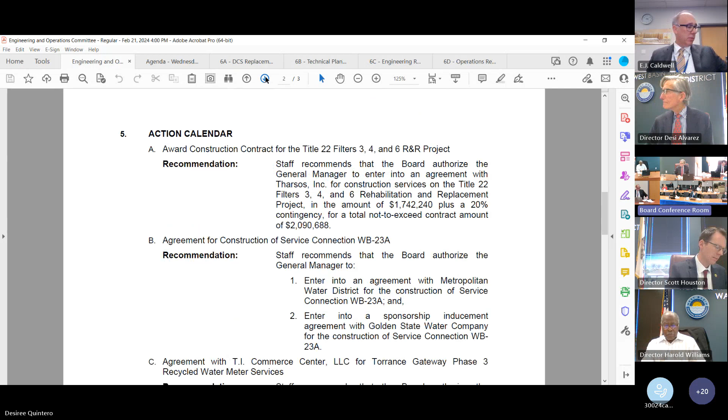First item up on the action calendar is the award of the construction contract for the Title 22 filters 3, 4, and 6 rehabilitation and replacement project. Mr. General Manager, would you introduce that item, please? Happy to do so, Mr. Chairman. This item is going to be presented by Orlando Rodriguez, our senior engineer, and it begins on packet page 4.

Thank you, EJ. Good afternoon, Chairman Alvarez and members of the committee. As EJ mentioned, I will be recommending award of a construction contract to Tharsos for the Title 22 filters 3, 4, and 6 R&R project.

As you may recall, in August 2023 at the E&O committee meeting, staff presented 3 alternatives, 1, 2, and 3, for the project to move forward. At that meeting, the committee recommended a hybrid alternative that combined elements of alternatives 2 and 3. Those were to perform an R&R on 3 filters now, also perform crack repairs on the exterior side of the north walls of filters 7 and 8, and then also moving forward to basically program ongoing R&R on the remaining filters, which were 11 total that we need to perform work on.

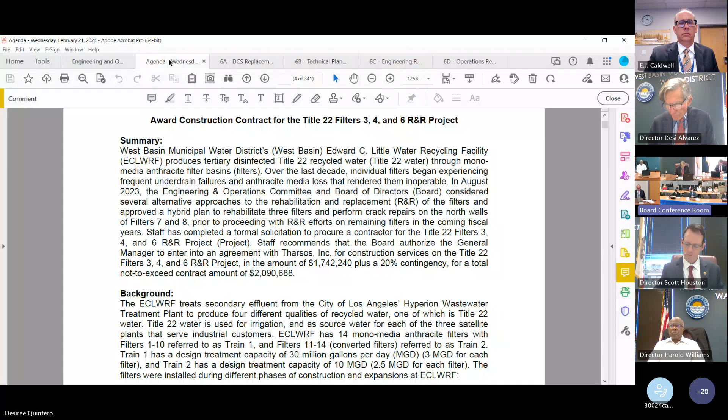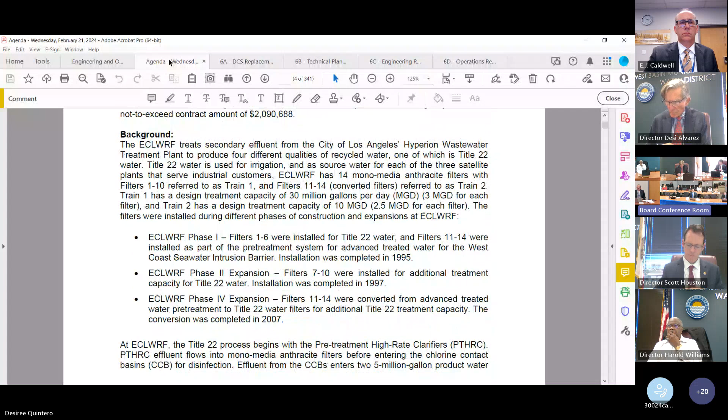At the August 28, 2023 board meeting, the board approved to proceed with the committee's recommendation. During that time, staff worked with the design consultant Carollo Engineers to essentially revise the drawings and specifications to reflect the recommended alternative. And in November of 2023, the construction bid package was completed, and therefore we proceeded with solicitation.

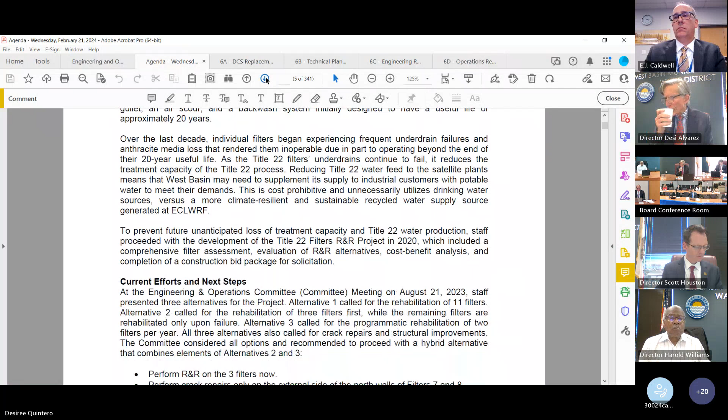The bid solicitation for construction services was issued via West Basin's online e-procurement system on December 6th of 2023. A pre-bid meeting was held on December 14th, 2023 via teleconference, followed by an on-site job walk that same day. 6 company representatives attended the mandatory pre-bid meeting, and 3 company representatives attended the on-site job walk at the ECL facility.

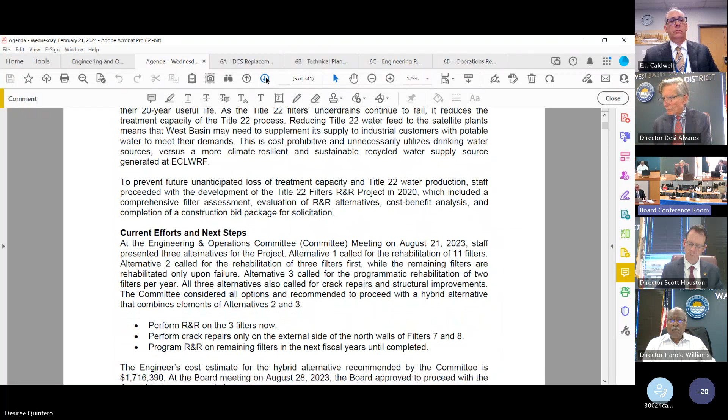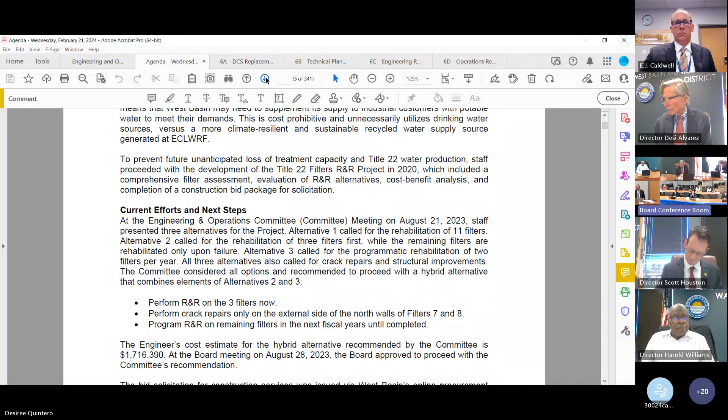3 bids were received and publicly opened on January 31st of this year, 2024, here at the DLD building. You can see the results of the bid opening on page 6 of the agenda packet in table A. The bid submitted by Tharsos Inc. in the amount of $1,742,240 was found to be the lowest responsible and responsive bidder. The engineer's cost estimate for this hybrid alternative is just north of $1.7 million, so pretty close to the lowest bid we received from Tharsos.

Tharsos is located in La Mesa, California, which is in San Diego County, near the city of San Diego. They have performed projects for several agencies in Southern California, including cities as well. Staff reached out to the contractor's references included in the bid package, and all of them seem to be in good standing, have worked, had good recommendations for Tharsos Inc., including actually West Basin. As early as 2013, they've done a couple projects for us, not only at our ECL facility, but also at our Chevron nitrification treatment plant facility. The most recent being in 2020, they worked on the sodium hypochlorite storage tank replacement project at ECL.

The preliminary construction schedule for the project, if we were to award this month, is to issue a notice to proceed next month in March, with construction anticipated to take place from March to November of this year, with project close shortly thereafter at the end of the year.

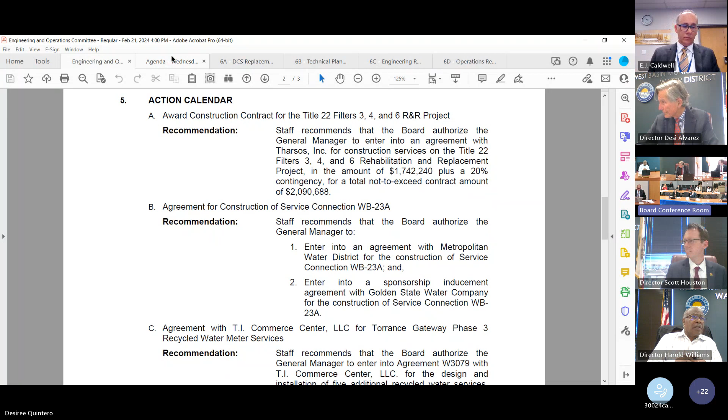All right, well, I don't have any questions, and unless there's objections, we would move this item forward. I concur. Well, this is a recommendation. And I second.

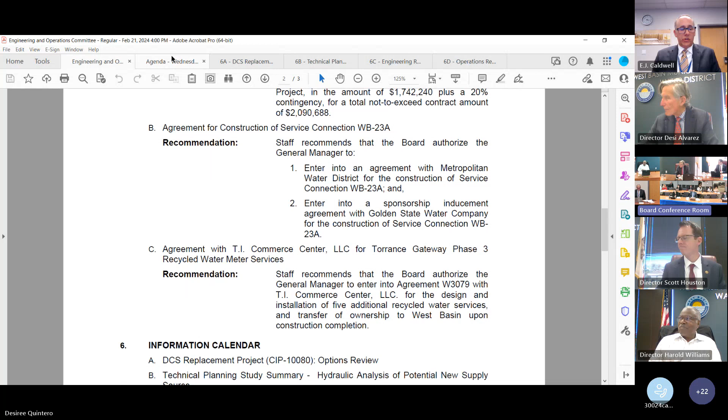Thank you very much, Mr. Chairman. So then we will move on to the next item, which is the agreement for construction services for service connection WB-23A.

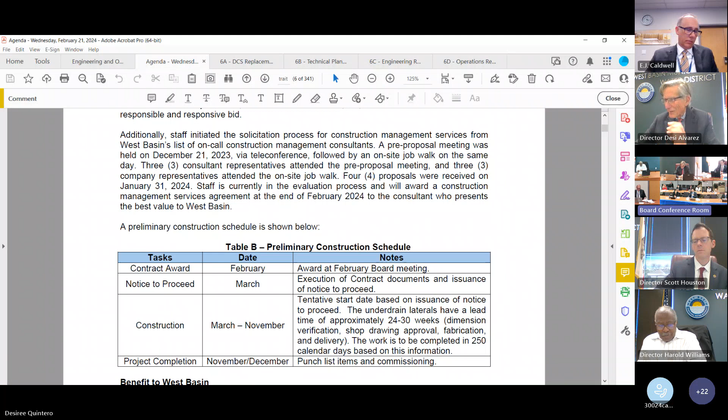Thank you, EJ. And as EJ mentioned, the copy of the staff report is on page 9. First, I'd like to start with some background on this particular project.

Back in March of 2018, Golden State Water Company requested that MWD service connection WB23 be relocated from the Metropolitan Culver City feeder to the Sepulveda feeder. Currently, all of Golden State's interconnections serving Culver City are located on the Culver City feeder. So as you can imagine, if there are any disruptions to that feeder, Golden State would have issues supplying water to Culver City. So they requested essentially a new service connection, labeled WB23A in this case, to add some redundancy to their system in case of any service disruptions.

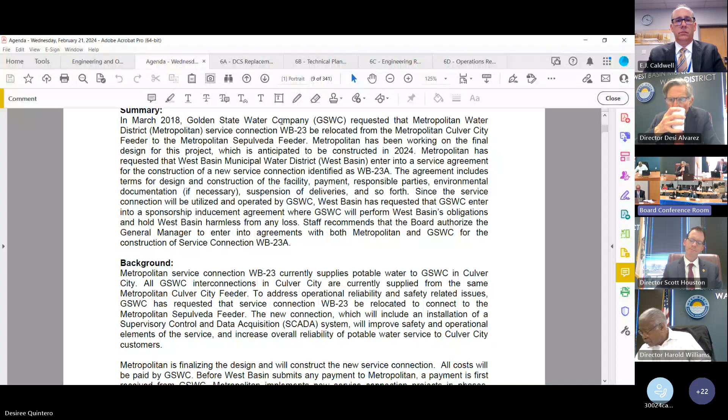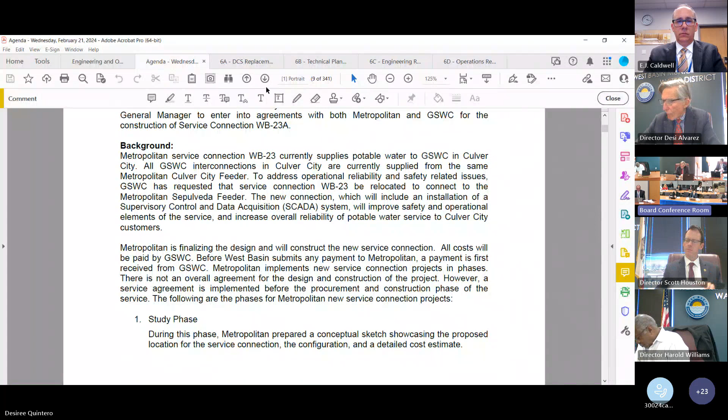Since 2018, MWD has completed the study phase for the project, preliminary design, procurement and fabrication phases, and more recently the final design drawings and specifications. Construction is anticipated to start this year.

As MWD gets ready to initiate the solicitation process to procure construction services next month in March, they have requested that West Basin enter into a service agreement for the construction of that new service connection. The agreement includes terms for construction of the facility, payment, responsible parties, environmental documentation if necessary, suspensions of deliveries, and so forth.

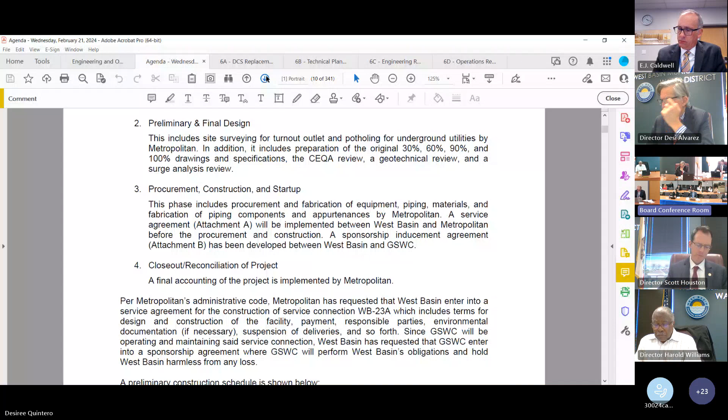You can find a copy of the agreement between MWD and West Basin on page 12 of the agenda packet as attachment A. After a few discussions with our legal counsel here at West Basin, it was recommended that...

...we then enter into what was called a sponsorship agreement with Golden State, seeing how they will be the ones utilizing and operating the service connection. So that agreement essentially states that Golden State will perform West Basin's obligations and hold West Basin harmless from any loss as described in the previously mentioned agreement with MWD.

You can find a copy of that agreement between Golden State and West Basin on page 16 of the agenda packet, and that is attachment B. In the end, all parties have reviewed the agreements, including staff, and have agreed to enter into the agreement for the construction of the service connection. Golden State is ready and wants this project to move forward.

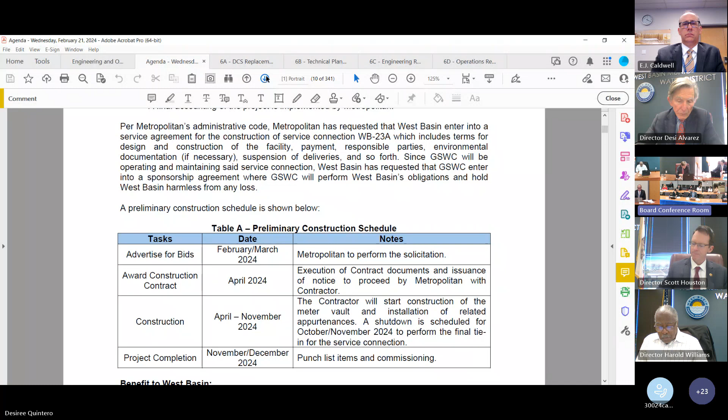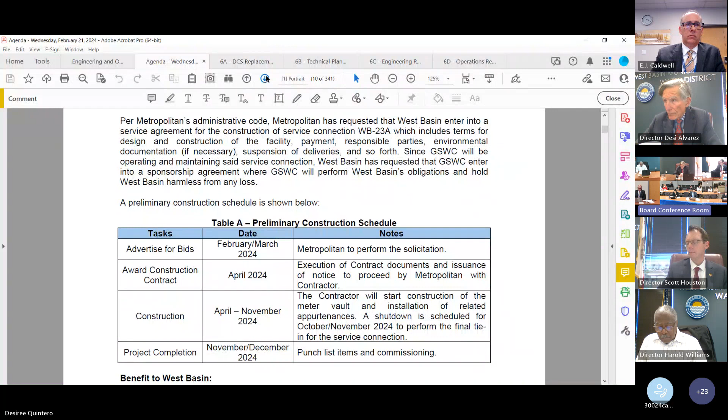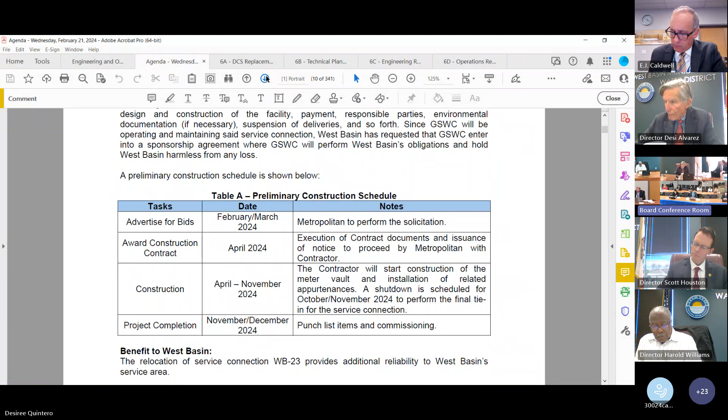So at this time, I would like to read the two recommendations. Staff recommends that the board authorize the general manager to enter into an agreement with Metropolitan Water District for the construction of Service Connection WB 23A, and enter into a sponsorship inducement agreement with Golden State Water Company for the construction of Service Connection WB 23A. And with that, I will be happy to answer any questions.

Mr. Chairman, if I could just add one thing, I really do want to commend staff. Our retail agencies are our highest priority, obviously, and the coordination between Golden State in this case and of course Metropolitan Water District, it takes quite a bit of work back and forth to make sure that everything is taken care of and that all parties are happy. So I just want to compliment staff on all that work.

Thank you. Okay, Director Williams, do you have any questions? Well, I did, but no, I don't. But it says here that this has been reviewed by both our executive engineer and a general manager. And from what I've heard here, I believe that I have no questions in terms of their work. Everyone's happy with it.

Director Houston, do you have any questions? No questions, just hope it's smooth sailing. And Director Gray, do you have any questions?

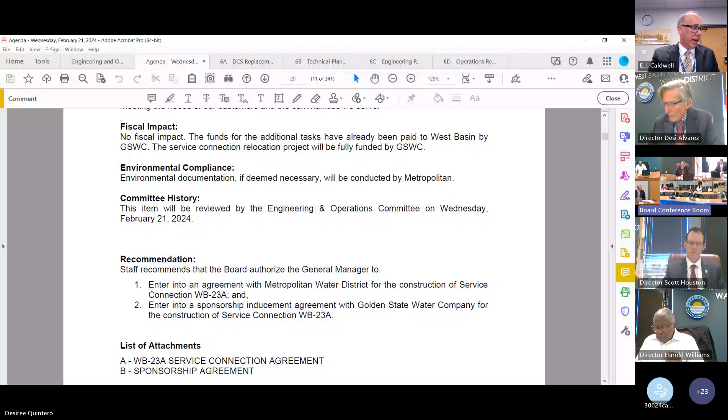All right, we will move on to item 5C, the TI Commerce Center for the Torrance Gateway Phase 3 recycled water meter service. This item begins on packet page 20, and for this presentation, Veronica Gobea, our engineering supervisor, will walk you through it.

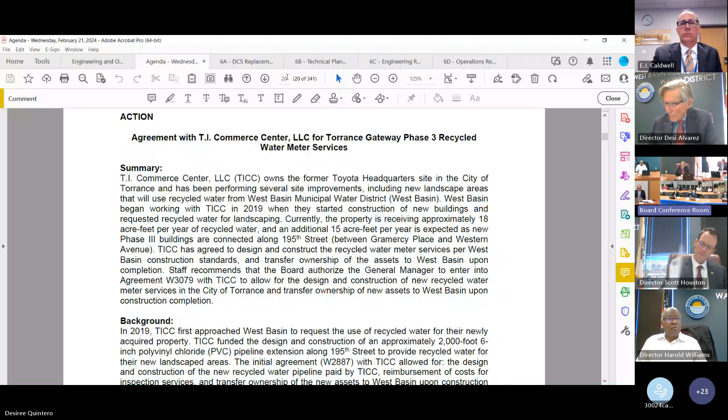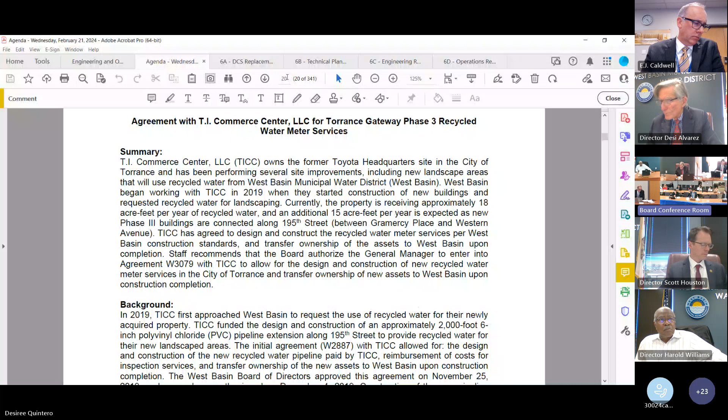Good afternoon, directors. This agreement is the third phase of this particular site. Back in 2019, the TI Commerce Center, who owns the former Toyota campus, approached us wanting recycled water within their campus. We went through an extensive review of plans and agreements for services to be provided to them. The first phase included the design and installation of a pipeline and some services, and West Basin was reimbursed for the expenses produced during that work.

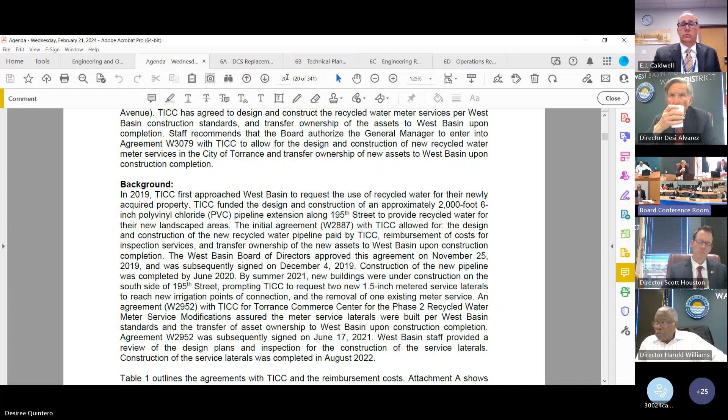A few years later, there was a second phase that added a couple of services to that pipeline. Services were minimal, basically in-house labor to inspect and review plans. That phase started in 2021 and ended in 2022.

In 2023, the TI Center approached West Basin to add an additional phase, bringing more recycled water to the campus by adding 15 acre-feet of recycled water to the site. West Basin worked with them to design lookup plans and draft an agreement consistent with previous reimbursement references. So we are here to present that agreement.

The agreement has been reviewed by West Basin and its legal department, as well as by TI Commerce Center, and we are here presenting it. Staff recommends that the board authorize the general manager to enter into agreement W3079 with TI Commerce Center LLC for the design and installation of 5 additional recycled water services and transfer ownership to West Basin upon construction of the project. I'll open it for any questions.

Thank you. Director Williams, do you have any questions? I don't have any questions, but I followed the history of that facility. They recycled water many years ago, and they've torn that down. I think it's very exciting that they're redeveloping it, and I certainly hope we support them.

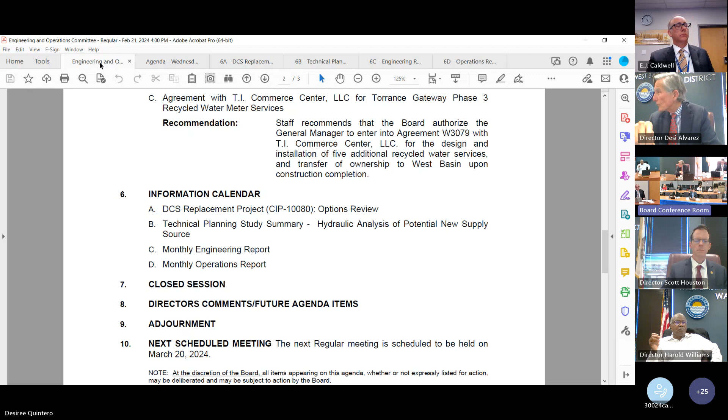Once reimbursed and finished, we become the owners. Correct. Thank you. If there's no objections, we'll move this one forward. All right, next item is the information calendar.

The first item on the information calendar is the DCS replacement project, and we'll be reviewing the options. Mr. General Manager, would you like to proceed with that?

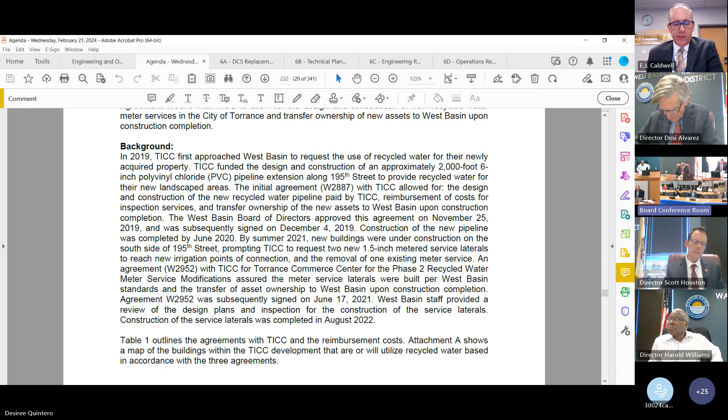Yes, thank you very much, Mr. Chairman. I wanted to preface this presentation in organizing the agenda. We definitely wanted to prioritize this item because we want you to familiarize yourselves with it. This is a crucial project as we move forward with our facility and its operation. For this presentation, we have John Benner, our engineer 2. This packet begins on packet page 232. If you have any questions as we walk through this presentation, feel free to ask us to pause, and we can answer your questions as we go along.

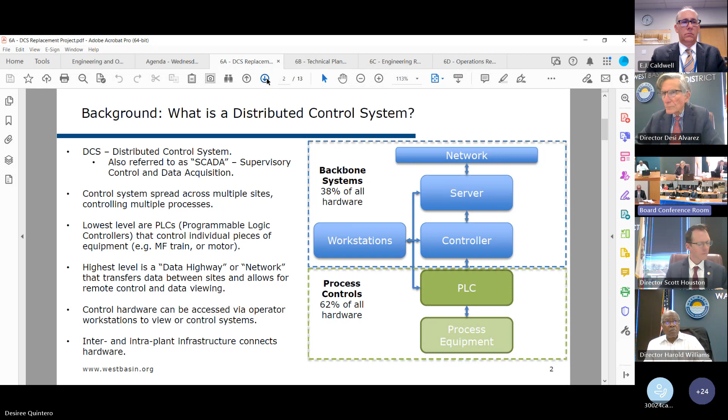Obsolescence in this sense has a strict definition. It means that the components are no longer manufactured or supported by their original manufacturer. This means that if they fail, it becomes difficult to find replacements on the market, and it's also a struggle to find firms willing to service them.

We're currently running into this issue at every level in our system. As an example, we are only one of three organizations in North America that currently uses the type of controllers we use. So both spares and technical support are hard to come by.

Further investigation by staff found that over 30% of this obsolete hardware has the potential to cause a full recycled water production shutdown of either ECL or one of our satellite facilities. A single failure in our system could lead to months of downtime.

We've recently experienced this issue at the Torrance facility, where some obsolete PLCs failed and took down the entire RO system. While we were luckily able to quickly find replacements, we struggled to get those replacement devices working with our old system, and I believe it was only this morning that the system came back online.

And so we were able to move off the potable water.

This obsolescence and lack of hardware availability is further compounded by other issues. Here at West Basin, we have limited institutional knowledge on how our DCS is set up and operated, as it has traditionally been managed by specialists on the contract operator side. We are running extremely outdated software across our entire system, most of which is no longer supported by the manufacturer, meaning no service updates, no cybersecurity patches, and no technical support for 7 years. This presents a significant security risk, as our system is currently vulnerable to cyber attacks, similar to those that occurred at water districts across the country in recent years. As I mentioned, our IT department does a stellar job in keeping our system protected, but they are severely limited in what they can do due to the age of our system.

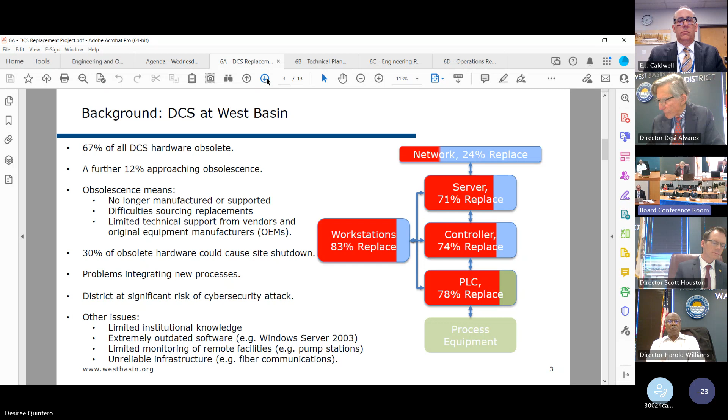In addition, our older system requires special extra measures to be taken when integrating new systems. As time and technology progresses, the gap between the new systems we're installing and our old DCS grows. An incompatibility was identified a few weeks ago on the JMM Phase 2 project that will likely require up to 7 weeks to overcome, and the contractor proposed an initial cost of almost $200,000 to resolve it. If we had a new DCS, the integration would have been seamless, but instead the contractor is having to bring on board experts from across the US that specialize in these old obsolete systems.

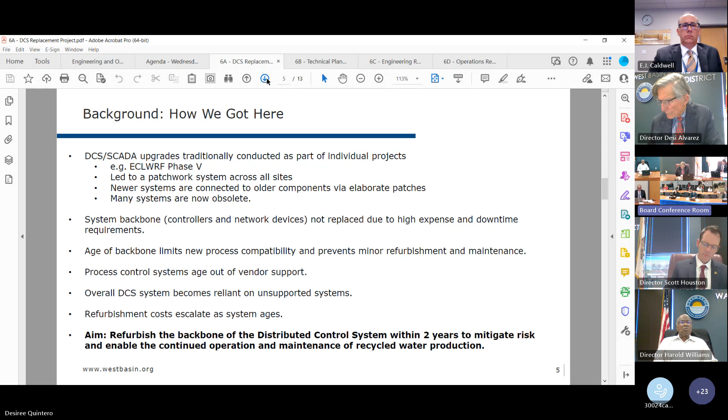You may remember that we came to this committee with a plan in August of last year. The plan then was to proceed with an upgrade through Emerson Electric, the provider of most of our current backbone system. We spent several months working with Emerson, visiting our sites, digging deep into our current system, figuring out what needs to be upgraded. And in November, we received a proposal from them for a backbone upgrade that would cost between $4 and $6 million and would resolve most of our issues within 1 to 2 years.

However, Emerson's system is proprietary, as shown by the letter to the district in attachment B of this report. Servicing, installation, hardware procurement, and software support is all done directly through Emerson, with no competitors or third parties able to assist or provide returns. Moving ahead with this proposed upgrade would lock the district into this system for the foreseeable future, which could potentially be a decade or more.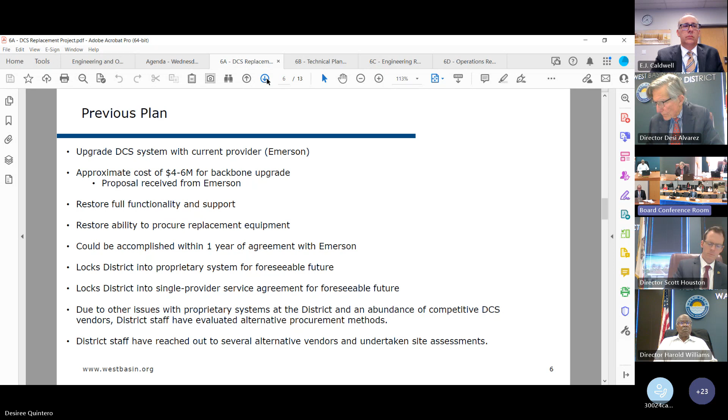While we are in a critical state with our current system, staff believes that we should not rush into locking the district into a lengthy proprietary agreement purely for the sake of expediency. Therefore, staff have reached out to other vendors and specialist consultants in recent months, in an attempt to establish the best possible path forward for the district.

I mentioned on the last slide that Emerson is a proprietary system. This table lays out the main differences when it comes to our control system. Effectively, a proprietary system limits the use of third parties to maintain, install, or modify the system. This limits the district's ability to both competitively bid work and apply pressure to underperforming vendors.

The district has had issues, particularly recently, with being locked into proprietary agreements, as if the district is unhappy with the quality or level of service from their system provider, there is little recourse beyond a large capital expense to remove and reinstall a new system.

However, the main benefit of a proprietary system is they tend to be cheaper upfront and quicker to install. This is mostly due to their plug-and-play nature, meaning that they can be implemented with minimal design work, but also because the vendor tends to absorb some startup costs in order to get a customer onto their proprietary system.

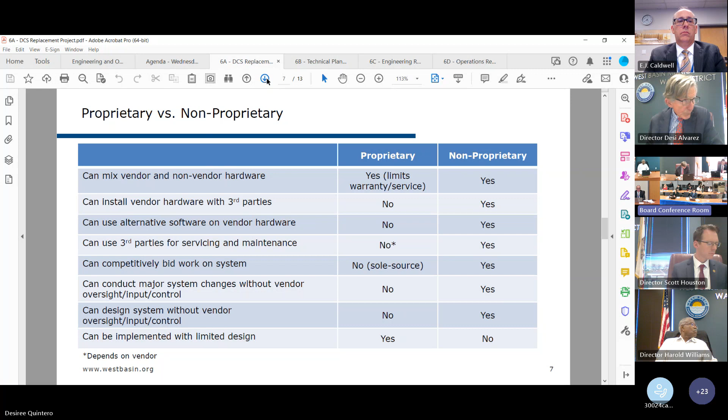That brings us to our options. The first of these is what I mentioned as our previous plan, to sole source the upgrades with our current vendor, Emerson Electric. As mentioned, this is likely both the lowest cost and shortest duration option. However, it would lock us into that proprietary system potentially for a decade or more.

Obviously, this option would be a sole source through a single vendor, so the district will also not get the opportunity to assess any other options on the market. In total, staff projects that this option would cost between $5 and $8 million in total to enact and would take up to 12 months to procure and install the upgraded system.

However, staff now believes that it's in the district's best interest to move away from sole sourcing and to evaluate the available systems so that the district can make a fully informed decision that will meet its needs for many years to come.

This procurement method will allow the district to undertake full analysis of different control systems on the market, design a system that fits the district's needs, and also conduct a full life cycle analysis to ensure the district installs a system that's not just a good upgrade now, but works in the district's interest for the foreseeable future.

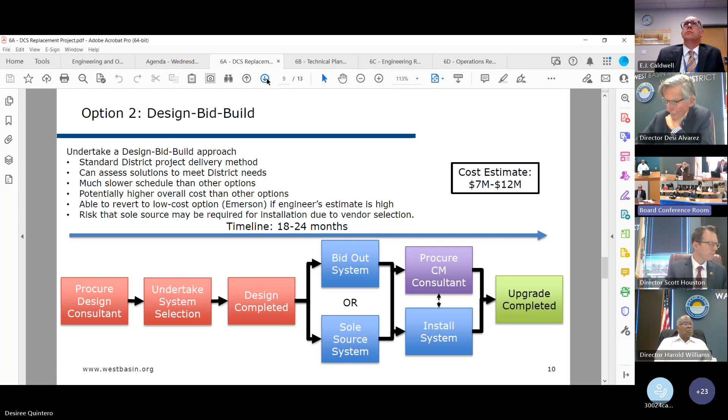The third and final option is the one recommended by staff: a progressive design build. The district has not completed a progressive design build project before, and legislation enabling it only came into effect in 2022. However, staff believes this project is an ideal candidate. A progressive design build procurement is similar to a standard traditional design build, where the full design and construction is given to a single firm to complete. In a traditional design build, this allows for reduced project durations, usually lower overall costs, and most of the time minimal change orders or costly design misinterpretations. However, this usually comes with increased risk due to the lack of competitive bidding at the construction stage and reduced owner input throughout the project.

Public works procurement legislation does not allow for a traditional design build procurement on this type of work, as it's limited to only new facilities, and this is a rehabilitation or replacement. However, legislation was passed in 2022 that allows for progressive design builds on projects such as this, so long as the total project value is over $5 million.

A progressive design build procurement method has similar pros and cons to a traditional design build, except that it has a break point in the middle where a construction cost is agreed based on the design so far, usually completed around the 60% design phase stage. This reduces the risk of being forced to commit to higher than expected construction costs, as the district has the opportunity to negotiate or reject the proposed phase 2 cost and seek alternatives. To further reduce this risk, the district intends to onboard an owner's representative to oversee the consultant and protect the district's interests.

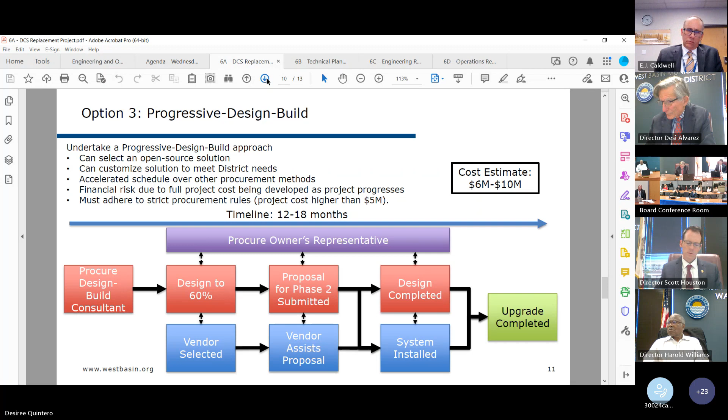That's upgrading the entire control system. The initial backbone refurbishment that staff are proposing today will comprise between a third and a half of that total. That's the estimated total cost of $6 to $10 million over the next 2 years. This backbone refurbishment aims to solve approximately 80% of our system's issues and allows us to slowly replace remaining systems.

We have secured $822,743 refinery funding to date. However, with a total project cost of up to $22 million, we would be able to request further refinery funding under our current agreements of up to $3.6 million. That's 3.6 in addition to the $822,000. These additional funds will be requested as the project costs become more concrete over the next few months.

In terms of this current fiscal year, we had allocated $1,200,786. However, as of January 1st, we've only spent around $37,000, all of which has been in staff labour. We intend to use some of the remaining budget to onboard a consultant for this backbone refurbishment and to purchase stopgap equipment to try and minimise risk over the next year while we conduct the design. But most of the remaining $1.2 million will not be spent this fiscal year.

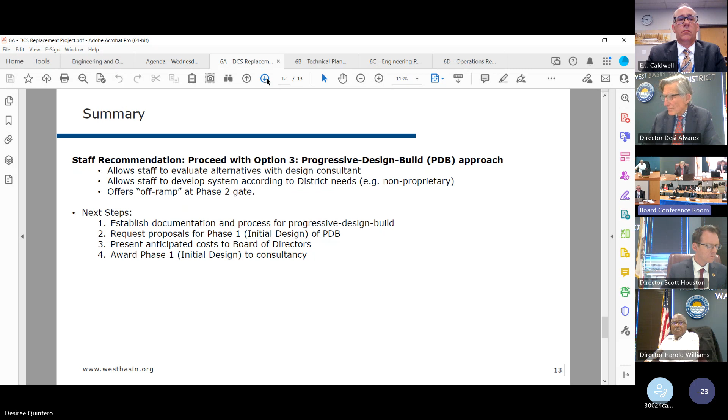In terms of next steps, staff will take some time to develop the documentation for the progressive design build procurement, we'll issue a request for proposals, and then bring this back to the board with a recommendation. Due to the importance of timing this project, staff aims to release the request for proposals in April and hopes to return to the board with a recommendation in June of this year. And with that, my presentation's over. Happy to answer any questions.

All right, Director Williams, do you have any questions? Yes, is this item informational or action item?

That's an interesting point. I thought it was going to be, and it is an informational item. But it also seems to be an item that requires some decisions and is moving. The intent is to move it forward. Am I wrong in that?

No, that's correct. The general flow on most items, we like to bring an information item to you to kind of walk you through the issues, walk you through the options. Ultimately, we like to take that feedback and then bring a corresponding action item. This particular presentation has been in the works for several months now, and so I felt it was prudent to bring it for you to see the different options, to see the thought that went into it, looking at cost saving options, but yet trying to deal with a crucial issue that has brought about significant challenges to not just staff, but of course our operations there at the ECL.

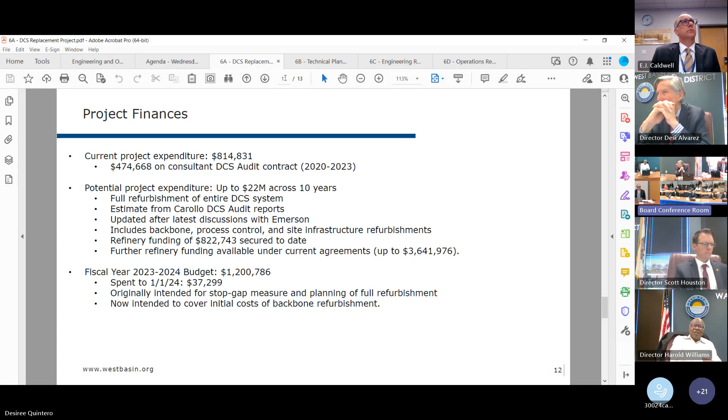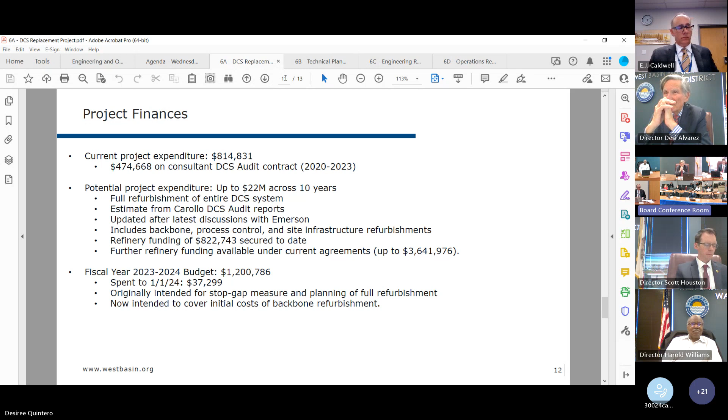We're gonna move forward, we have to move forward. I understand that, but like now, not in 10 months. So bring it back next month and then we'll put you on track to, as you said, put it out. 'Cause you're ready to rest your career on this, right?

All right, so we'll move on to the next one, the technical planning study summary for the hydraulic analysis of potential new supply source. General manager.

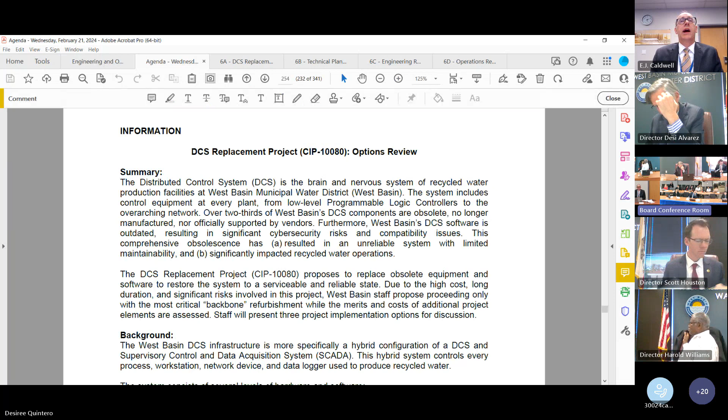Yes, thank you very much, Mr. Chairman. Let me just preface this item. Typically we'd have our Executive Manager of Engineering Operations, Parker Masurlian, here for this presentation. Unfortunately he's out ill at this time. We do have Orlando Rodriguez, our Senior Engineer. We're happy to go through this item in as much detail as you'd like.

We can make it briefer or provide the entirety of the presentation. But I wanted to let you know that the reason this item is being brought back - this was included within our budget as one of the technical planning studies we identified as potentially needed in order to bring pure water into the West Basin service area. I was very pleased that not only did the work get done, it was done in partnership with Metropolitan Water District, with no cost other than staff time for the technical planning study. So with that, I'm going to hand it off to Orlando, but again it's at the pleasure of the chair - we can go into as much detail as you'd like.

I'd say just do a quick presentation unless the board has more questions. What presentation? So do a brief presentation.

Sure, thank you EJ. So the presentation starts on page 259 of the agenda packet, but I'll go ahead and move forward if that's okay. As we go to page - sorry - 263 of the agenda packet, and that really is to highlight what EJ mentioned was the hydraulic analysis.

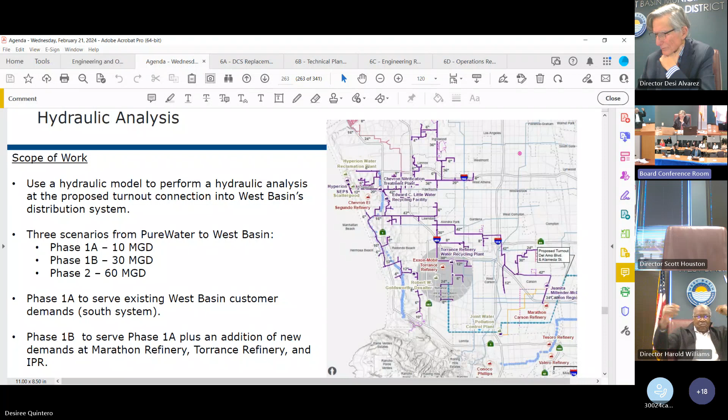There you go, perfect. So as EJ mentioned, as part of the Pure Water program, we did work with Metropolitan Water District in performing a hydraulic analysis, basically to convey the advanced treated water from Pure Water to our distribution system. Metropolitan Water District procured the services of HDR. HDR has worked on our recycled water master plan, creating a hydraulic model for our distribution system, which is essentially a working graphical representation of the pipelines and so forth.

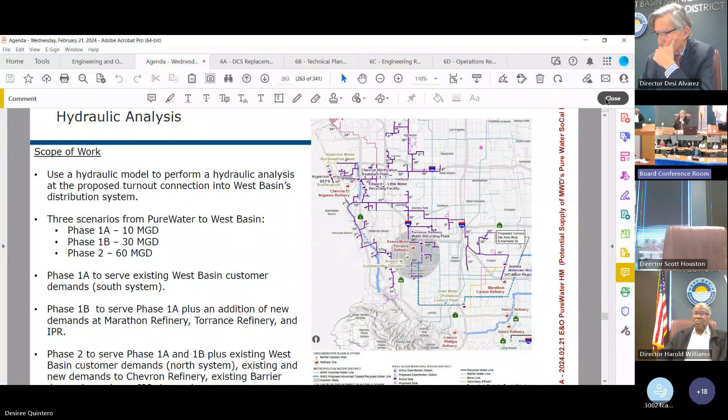So with that being said, for the hydraulic analysis portion we did consider 3 phases on how water would be conveyed to our distribution system. As you see there on the screen, there's phase 1A at 10 MGD, phase 1B at 30 MGD, and phase 2 at 60 MGD, which is kind of the ultimate condition.

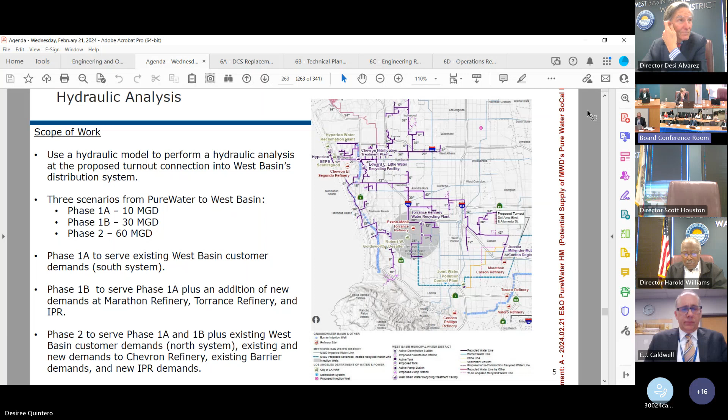Quick recap: phase 1A is to supply existing West Basin customer demands on the south system, just for purposes of making this simpler. We consider the south system being south of our Edward C. Little facility, and north of that, the north system, just for simplicity. So in that case, phase 1A would be serving those demands.

Phase 1B would serve the demands from phase 1A, as well as some additional demands at the refineries and some IPR demands. And then phase 2 would serve both phase 1A and 1B demands, as well as the demands on the North system and so forth. Next slide, please.

So using the hydraulic model created by HDR for this analysis.

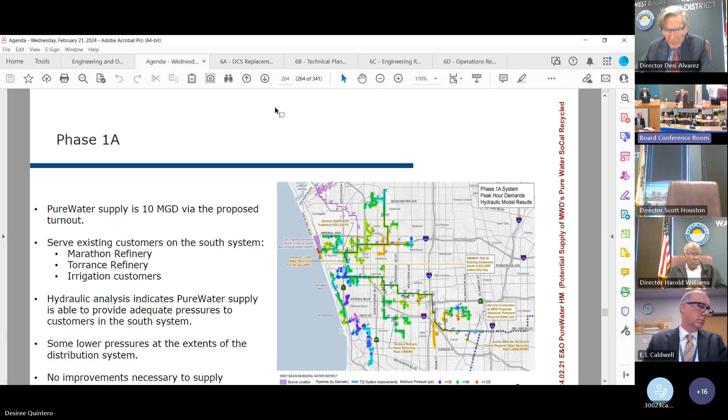As you can see in the analysis, from the proposed turnout structure that MWD is proposing near the intersection of Del Amo and Alameda Street, as it travels north on Alameda then west on Del Amo, they're proposing a turnout structure at that location. Our closest connection point would be where our distribution system is at the intersection of Wilmington and Del Amo.

So just over a mile from their proposed turnout structure, for phase 1A the hydraulic analysis indicates that the supply from Pure Water is able to provide adequate pressures to serve customers in the south system. There are some lower pressures at the very extent of the distribution system, but not too many, and in this scenario there are no improvements necessary to supply those demands for phase 1A. If you look at the exhibit on the right, the colors in typical fashion show green meaning adequate, good pressures throughout the distribution system. At the very extent you'll see some blues and purples indicating lower pressures, but we're still able to essentially provide water to those customers.

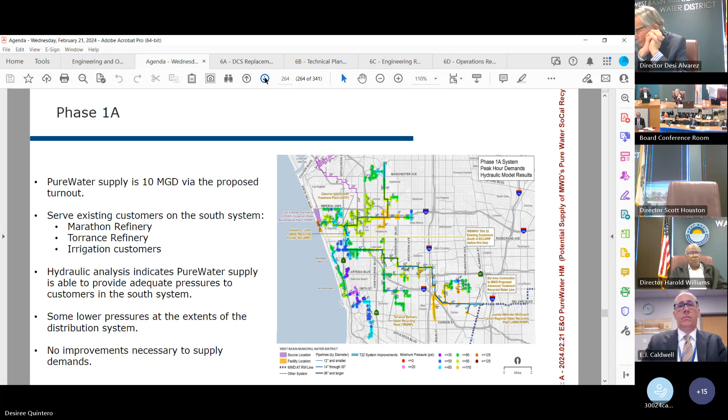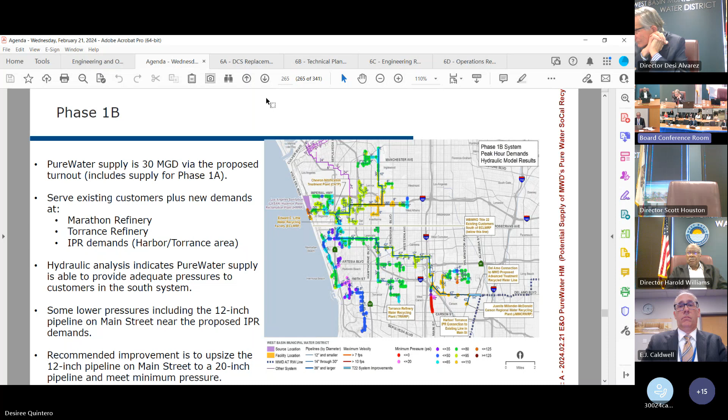Here is phase 1B, once again serving those existing demands, plus some additional demands for the refineries and IPR demands in the area. We are still able to provide adequate pressures to customers on the south system, but in the middle bottom area you'll see some red, which indicates lower pressures there in supplying 30 MGD throughout that south system. So the recommendation at that location, to serve those customers as well as some potential future IPR demands, is to upgrade that pipeline from 12 inches to 20 inches to provide adequate pressures. At the extent you'll see some blues and purples, but mostly green, indicating fairly good pressures throughout our distribution system.

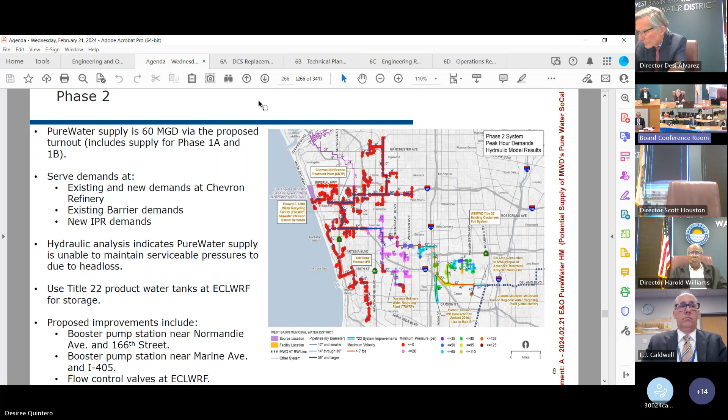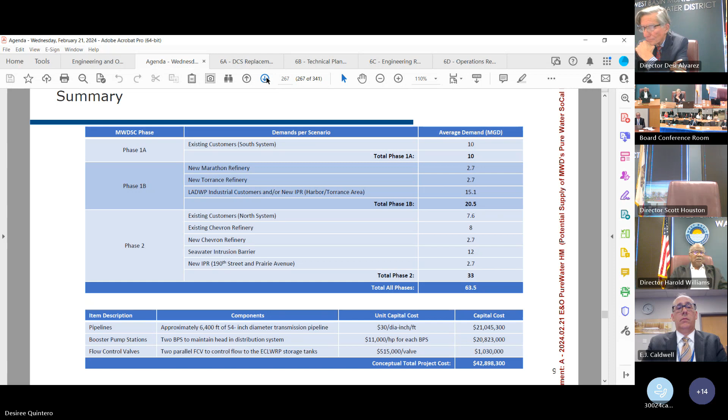I'd like to discuss some next steps. As EJ mentioned, as part of the budget process last year and also during our CIP program or technical planning, we did identify 7 studies in total that were included in the budget for 23-24. But in this scenario, we are prioritizing 3: the Pure Water Interconnection Pipeline Evaluation, the existing distribution pipeline assessment, and the backup potable connection study. We feel these need to be the first studies performed for conveying water from Pure Water to us, to West Basin distribution system.

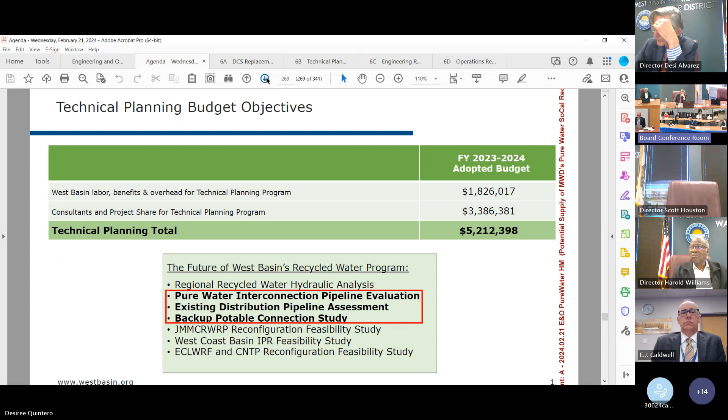So here is just a really quick background. I'm not sure if you recall this or not, but these were presented in the budget process. I'll just go over them really quickly.

The Pure Water Interconnection Pipeline Evaluation, as I mentioned, is for installation of the pipeline from the turnout structure at Del Amo and Alameda to our distribution system. This study would essentially look at some pipeline alternatives for alignments. I know it makes sense to just go across Del Amo straight shot to our distribution system, but we do have to consider other options. We would also look at alternative turnout structures, storage options, identify jurisdictional agency and permit requirements, and so forth.

What I do want to say here is that the turnout structure is part of MWD's scope of work in designing that. So we would be essentially designing a pipeline from that turnout to our distribution system. So that is this particular study.

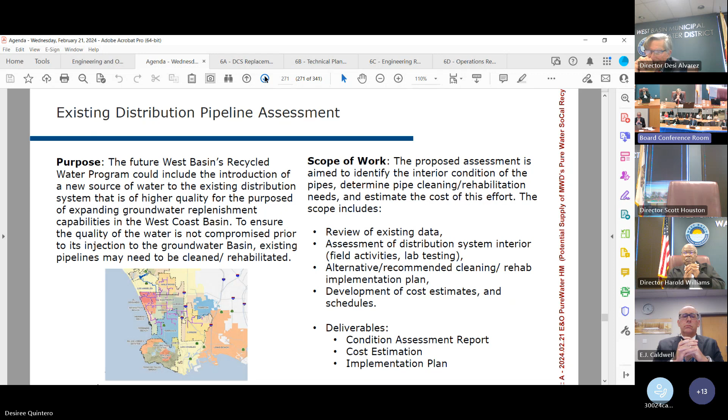And then here the existing distribution pipeline assessment. It would be pretty obvious that if we are to convey advanced treated water into our distribution system, we have been essentially conveying Title 22 water in that system. So over the years, as you could only imagine, biofilm and other things are residing in those pipelines. In this particular assessment, we would be looking at essentially all data, really what's essentially in there, assessing the interior of the pipelines itself, and alternatives to cleaning.

There's a lot of methods out there. I'm sure you've heard of hydrojetting, pigging, and so forth. So we'll be looking at all those options. And then the extent of our distribution system, we have miles and miles of pipelines. So this can't be done in a year or so, right? We need to kind of program this to a level. We need to do certain miles of pipe throughout, I don't know how many years to be honest with you, but just on and on until we essentially clean everything. We've never undertaken something like this. So this assessment would essentially at the end put together a program and a cost estimate to do all that work. So that is this particular study.

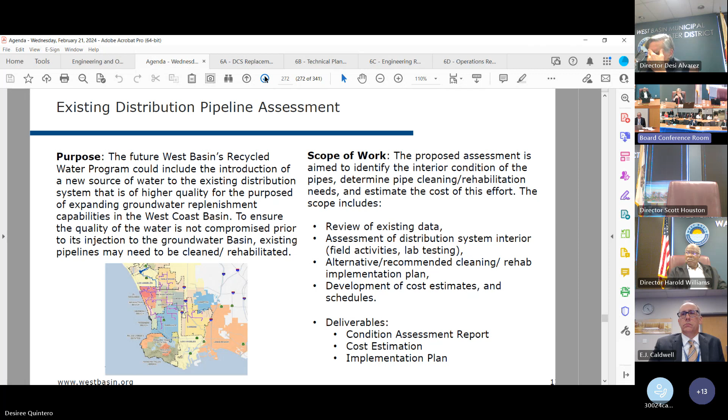Then last but not least, for the 3 here, this is the backup potable connection study. West Basin does have obligations to essentially meet our demands to our customers. So in this particular study, if for whatever reason supply from Pure Water is disrupted at any time, we still have to meet those obligations. So what this particular study is looking at is a backup connection somewhere within our distribution system to be able to provide water when, for whatever reason, we don't have enough from Pure Water itself.

So we're able to kind of balance that out, right? If it peaks up here, Pure Water is just lower or whatnot, we're able to then supplement and meet our demands across the distribution system at any given time. This particular study will be looking at alternative options, connection points and so forth, storage improvements, and then at the very end, a cost-benefit analysis for this particular study.

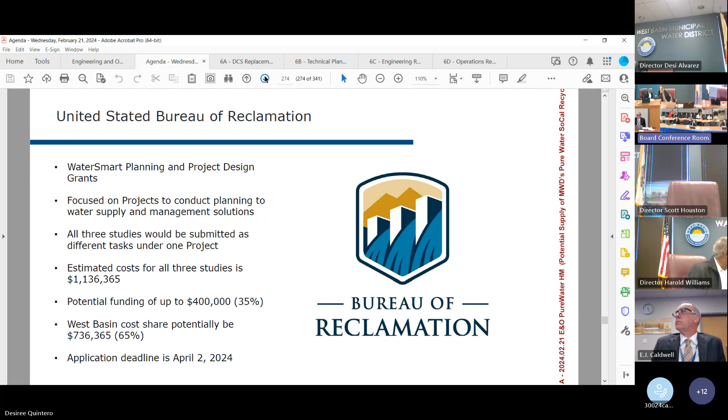And now on the grant funding. I do want to mention that staff did evaluate several grant funding opportunities available for these particular studies. This one specifically, we have identified one offered by the United States Bureau of Reclamation. This particular grant is the Water Smart Planning and Project Design Grant, which is focused on planning efforts to essentially supply diverse water supplies and management solutions for providing water to the region.

All of these studies will potentially be submitted in one application. They're under different tasks, so all three will be submitted under one grant application. The estimated cost for the three studies is just over $1 million, and this particular grant has a potential funding of up to $400,000. So best case scenario, if we're able to achieve this grant funding, West Basin's potential cost share would be just north of $700,000, offsetting some of the costs needed to perform those three studies. This grant application's deadline is April 2nd of this year, so we do have time if we're interested in applying for this particular grant.

Mr. Chairman, the one thing I would add is that I've been looking at the technical planning studies. Obviously, the CAMP4W process that is being managed by Metropolitan Water District is potentially going to delay some of the different looks as far as how they proceed with pure water.

Some of our technical planning studies related to pure water can be delayed into other fiscal years. We'll continue to work with Metropolitan Water District, as they have a significant benefit working with West Basin and introducing the water into our system potentially. We'll continue to work with our partners. I don't anticipate us applying for a grant on this at this time. We'll have to look at that as part of the budget, but I think there's time for us to evaluate.

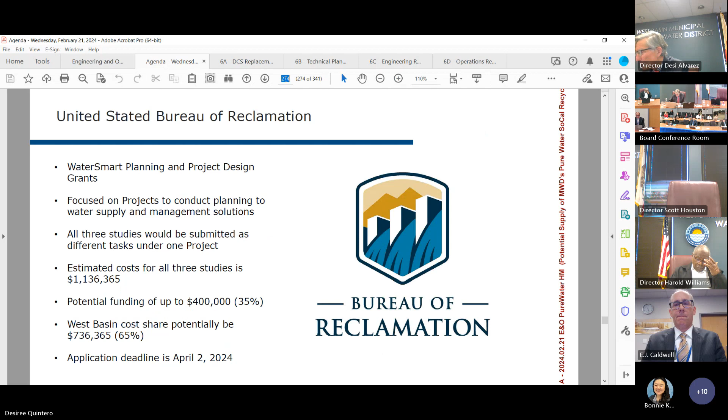When we show the Del Amo connection, is that on the 7-foot diameter pipe that we're coming off of? Yes, and Met's going to build that short segment to the west of the knee of the Del Amo, of the Met 7-foot diameter pipe. If you look at that Del Amo intersection, there's a knee, there's a bend, and that would be on your presentation, right, page 270?

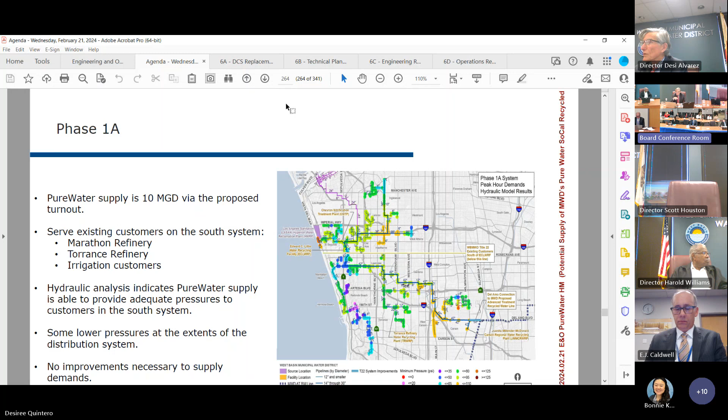Hey, 264, 265, whichever one you want to go to. Anyway, were we going to come up with a 54-inch line off the 7-foot diameter pipe? So Met's going to build that? That's not my understanding. My question is, is Met going to build that? Right now, no, they're only going to build the turnout structure. And it would be on us to build the rest. Well, yes.

What is the operating pressure? And you don't have to answer this right now, but what's the operating pressure of that 84-inch pipeline at that location? I don't have that right now, but okay. I understand their operating pressure is going to be pretty high, and you can see that we have these static losses, which is interesting, why that would be the case. Anyway, if you could get back to me with a little bit more detail on that.

And I think, to the general manager's point, if this project were to come online, we're only going to be taking some of this water. We even talked about what the cost of this water is going to be. How is Met going to price this water? Have they shared any ideas? The discussion on this project has been ongoing for a couple of years, and we don't have any concrete information. That's why I'm saying we'll continue to work with Metropolitan Water District as this project moves through the CAMP4W evaluation process.

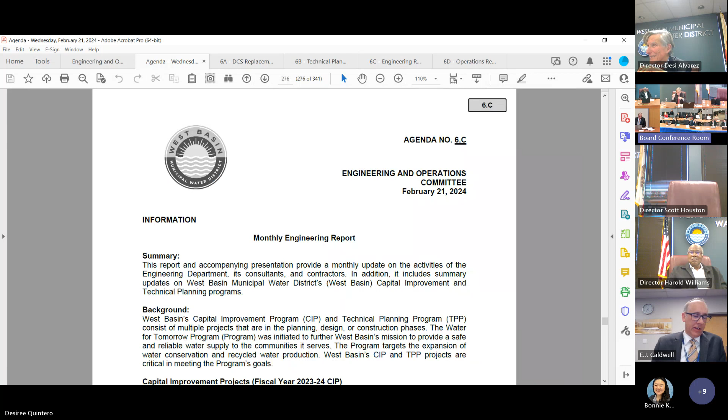Mr. General Manager, we'd like to get out of here relatively soon, but I know that we keep cutting this agenda short. I don't want to cut off the two presentations again, so if we can restrict each to about 5 and no more than 10 minutes. We'll do our best, and we'll try to speak to the very crucial issues.

As you mentioned, item C, the monthly engineering report. We do have our team of engineers led by Veronica Gobea, as well as Orlando Rodriguez and Kevin Collin. I would like, if you don't mind, if you could just touch on real quick the JMM expansion minimally.

And then also Orlando, I know that a lot of work has been done in relation to the El Segundo connection. So maybe if I can interrupt you on that, I think we're going to have more discussions on JMM, so that might be one that we don't need to cover now. We can do that at the board meeting. I know we will have more involvement next week.

So let's talk about what's happening with the recycled pipeline, Palos Verdes extension. If you don't mind, that'll be Veronica Gobea. Yes, I'll be super brief but informative now.

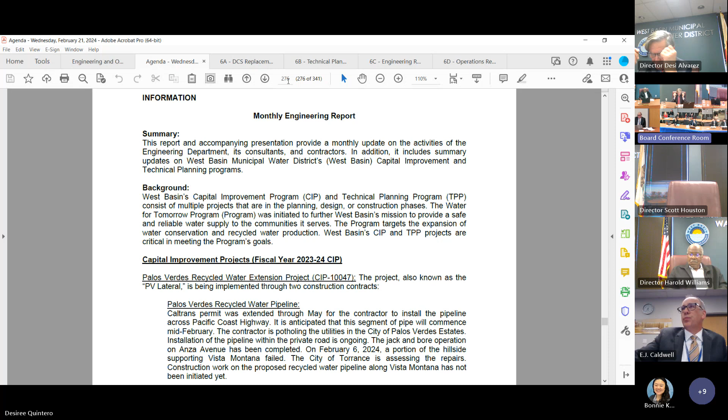You can please go to package page 283. That particular page is in reference to the schedule. Right now, we are still on the same schedule. However, there's been more rain and we are assessing the impact in regards to the schedule. So by next month, we'll have a much better idea of whether that schedule has been moved.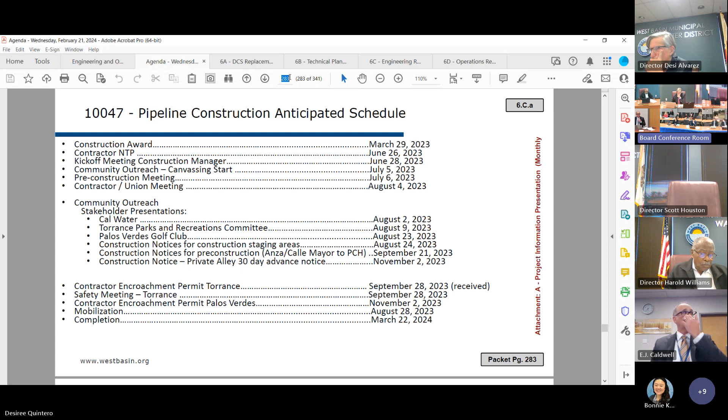In regards to pipeline construction, we are caught up on all the RFIs, requests for information. You can please go to pages 285 through 287. Those are basically the progress of the pipeline construction as they go along the streets on High Grove, Pasillas, Tortugas, and Montana Avenue. I'm just trying to show on the figure on the right-hand side the location of where those photos are being taken to get you an idea of the geographic area.

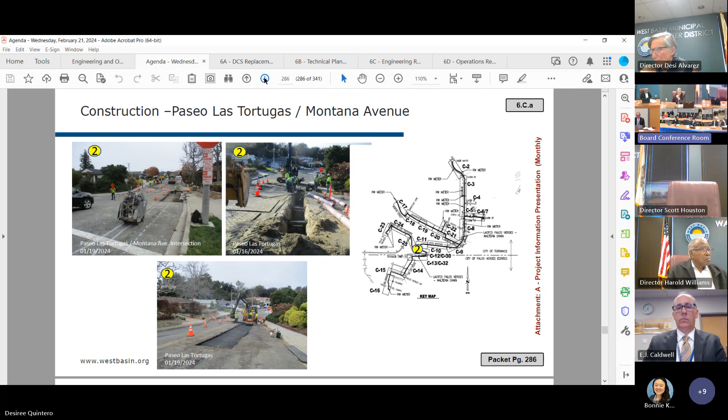However, one of the items I really want to talk about is on Vista Montana, which is on page 288. During the previous rain event, not this one that happened this weekend, but the one where it rained literally the whole week continuously, there was a slide on Vista Montana. In the picture on that page, you can see on the right-hand side, right at the bottom, there's a pipeline delineation, which is the alignment where our recycled water pipeline is going to go through. Right now, the city of Torrance is waiting for a geotechnical report that is expected to arrive this week.

We are trying to set up the meeting for next week to go over what the report means and what we can do for construction, and how long it's going to take for the city of Torrance to identify the repair needed for that hillside. Right now, that particular stretch of Montana is closed to the public because of safety issues in that area, and it's still undetermined what the main cause of the issue is.

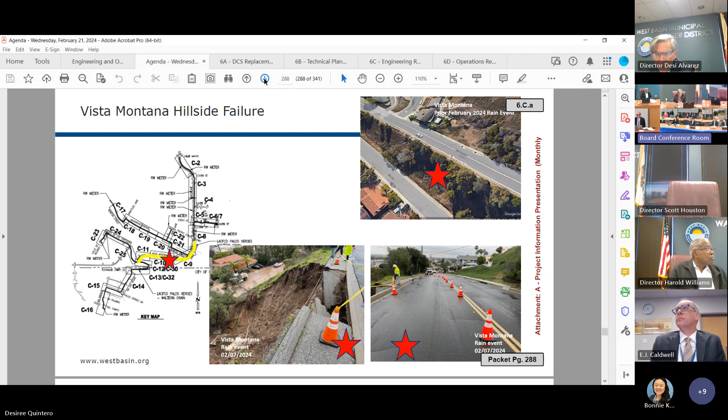In regards to the pipeline, page 289 is essentially a summary of the PLA, or labor compliance. We are okay on the at-risk hours and the apprentices. The local is still not meeting, trying to get to the goals we are trying to meet. Because these reports are from December, it only shows a couple of subcontractors working on the project. This month, I've already seen the numbers, and they are finally achieving those goals.

In regards to the pump station, we issued a notice to proceed, dated February 6, 2024. We had our pre-construction meeting yesterday; the city of Torrance, as well as the entire team, construction outreach, construction manager, designer, and contractor, were invited to that meeting. We are now scheduling our meeting for the unions, the PLA, also for next week. Once we start seeing the shop drawing submittals, we'll be able to determine when the contractor is going to mobilize into the site. In the meantime, we don't want to waste time, so we've already started reviewing the shop drawing submittals - that's in process.

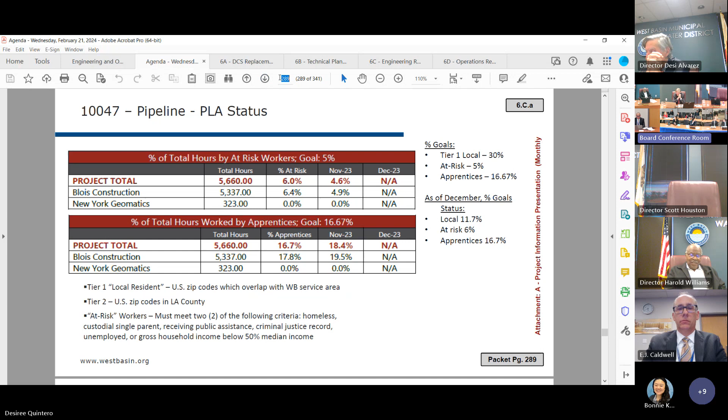You're doing a presentation on... the Nash Street project? I don't know if the committee would want to hear that or not. The Nash Street project - that's the lateral for the developer CDC. We met with them, if you recall. Okay, if you could turn to page 294 of the agenda packet.

I'll quickly go over this - if you recall, this is the installation of a new 6-inch lateral. The city of El Segundo is extending Nash Street, very close to our Edward C. Little facility. We'll be providing recycled water, and to highlight, this will be providing water for the headquarters and training facility for a small local football team, the Chargers. About 66 acre-feet a year. Next slide, please.

I wanted to highlight the tie-in at El Segundo Boulevard that EJ alluded to. We added this scope of work when we met with the developer. If you look at the solid purple line, that's the lateral they designed that will connect to our existing lateral, which is the dashed line going north and south on El Segundo Boulevard. The scope of work there is to saw cut the concrete, excavate, chip the cement mortar coating, hot tap, install a gate valve, and then backfill. Next slide.

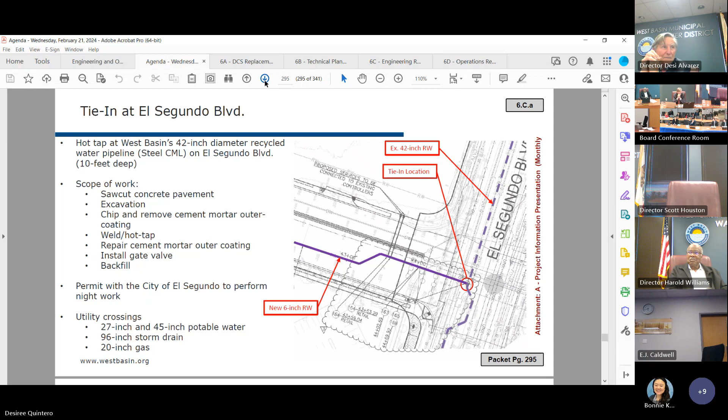Here are some pictures of that particular work. It started on January 16th. The pictures at the top left progress chronologically, from top left to top right, then bottom left to bottom right. They began with saw cutting that day, then progressively excavated as each day went on. Eventually they reached our pipeline and started chipping away at the cement mortar coating on the exterior of the pipeline. Next slide, please.

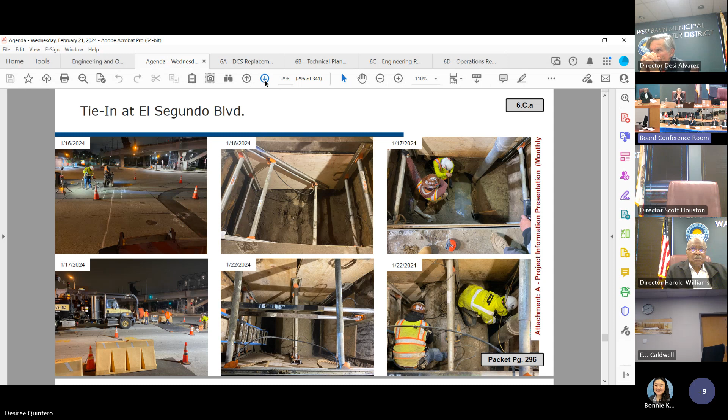And then expose the steel underneath that cement mortar, as you can see there on the top left. Began prepping the pipe, installed the wrapper, and then at the bottom left there, what you'll see is a nozzle that was installed or welded onto that pipeline along with the gate valve in red. It's a little hard to see, but eventually at bottom right there on January 28th, they hot tapped that line.

So the valve is installed there, it's closed. They have backfilled, installed the riser can to the road, and I believe installed the permanent pavement already at that location. So the only thing missing there is the actual lateral coming from the other side to eventually connect there. Next slide.

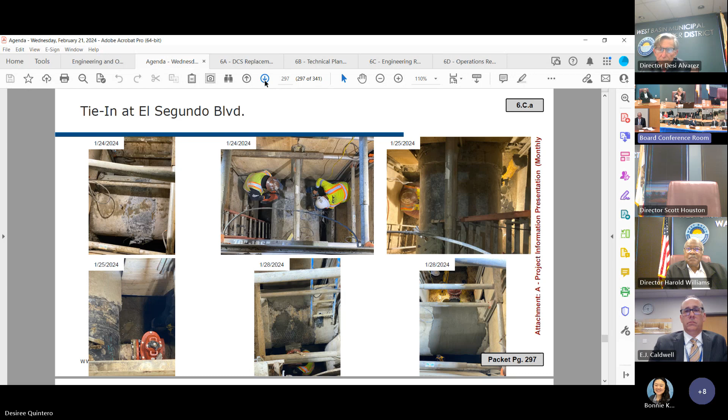So these are the next steps for this particular project. They're very close, approximately 80 to 85% complete. They are continuing to perform hydrostatic pressure testing along different sections of the pipe as they build it. They'll perform the test and then connect. They will be continuing to install service laterals, meter boxes, and so forth, air vacs.

Remaining things to do also include inspection by the Department of Public Health and West Basin staff. Once final approval is received, they will install all the service meters. We believe they have about 1 to 2 months remaining of actual work, which is well before the deadline to turn over the facility to the chargers, with the street being dedicated on July 1st of this year. So they're ahead of schedule, and I think we're pretty much set. That's about it. Thank you.

Thank you very much, Mr. Chairman. I don't know, I'll ask Veronica and Joel, are there any other items that you think are crucial to present before we move on to operations?

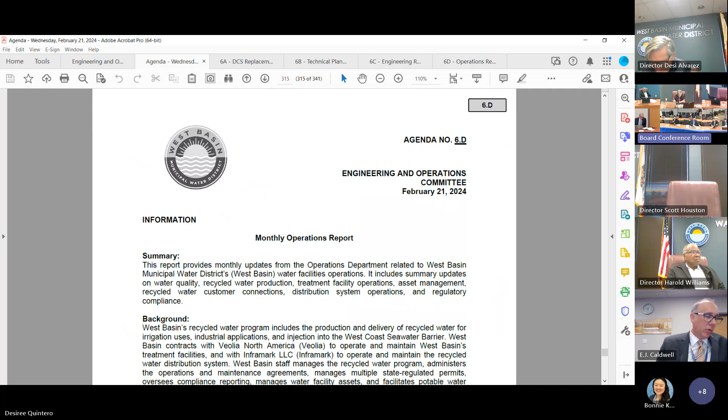Okay, well then that would bring us to item 6D, our monthly operations update. I know we have Uzi Daniel, Manager of Operations, as well as Susanna Lee, our Operations Supervisor, Jamie Malpete, our Water Quality Environmental Compliance Supervisor, and Frank Fuchs, our Operations Supervisor, to present. I don't know, Uzi, if you want to walk through any crucial items, perhaps Torrance Refinery.

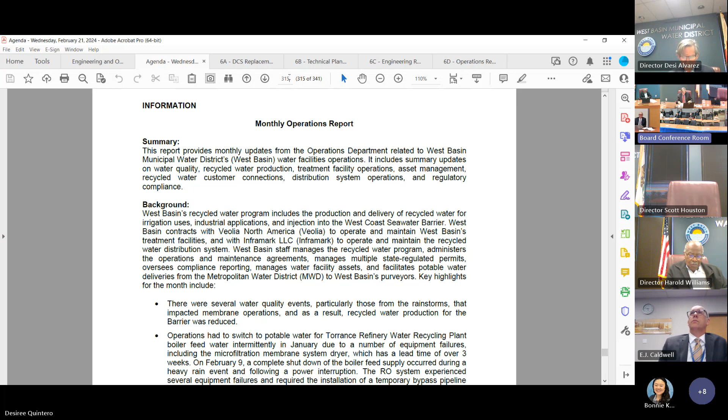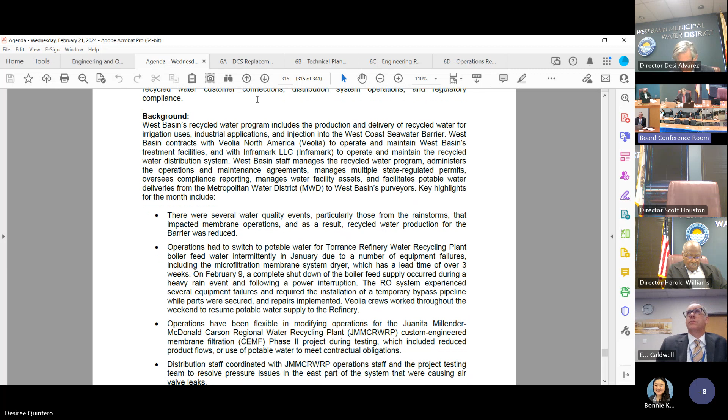For production side water quality, when there's pain at Hyperion, there's pain for us. The storms do cause a lot of havoc. Many people are aware that they had to open their screens up, all of them, at the beginning of the big February event. All of that sediment, trash, debris is sitting in their primary treatment. So we have seen turbidity and TSS up near 100. We are dealing with it, but we have to turn off our membranes often on barrier to try to save them and preserve them. So we're managing that, communicating with them. They've given us about a 1 week to 2 week time frame when they think they'll be able to recover.

So this time in the storm events, even though they're not combined technically sewer with storm drains, they get a lot of infiltration, and during these big events, they get overwhelmed. Well, their screens started to fill up with so much debris that they opened them, had the bypass, and that just allows all the raw water to come in, and they try to treat it. So that's what happened this time. I guess the good news is they didn't flood their site or damage their equipment per se, but it did get into all the basins of primary treatment, and they are struggling to keep up and recover.